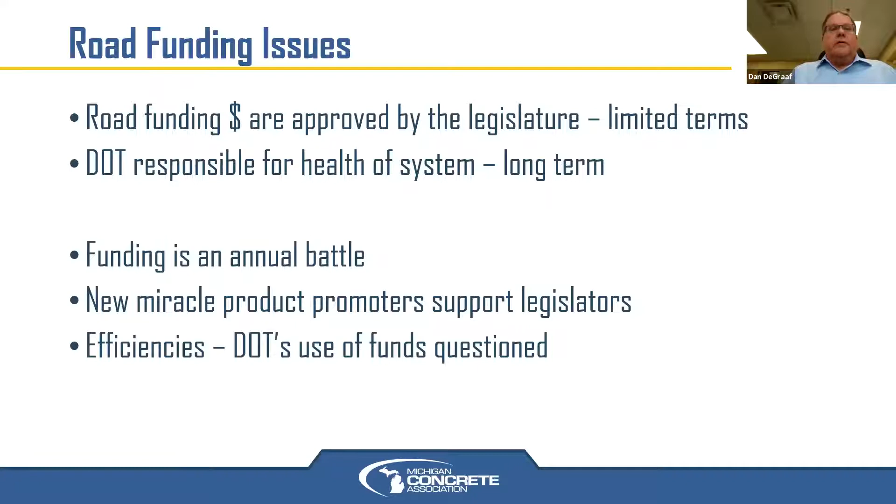So that's kind of the ground rules where this all started. Back in 2015, the legislature agreed to, over a 6-year period, increase the road funding in Michigan by about $1.2 billion.

But that came with a hook, and that was that the department was required to set up a road innovation task force. Their task was to evaluate materials and methods that could allow for roads to last for 50 or more years. They were willing to spend money up front as long as it produced life cycle cost savings over the long run. They wanted to focus on longer term fixes to maximize the value.

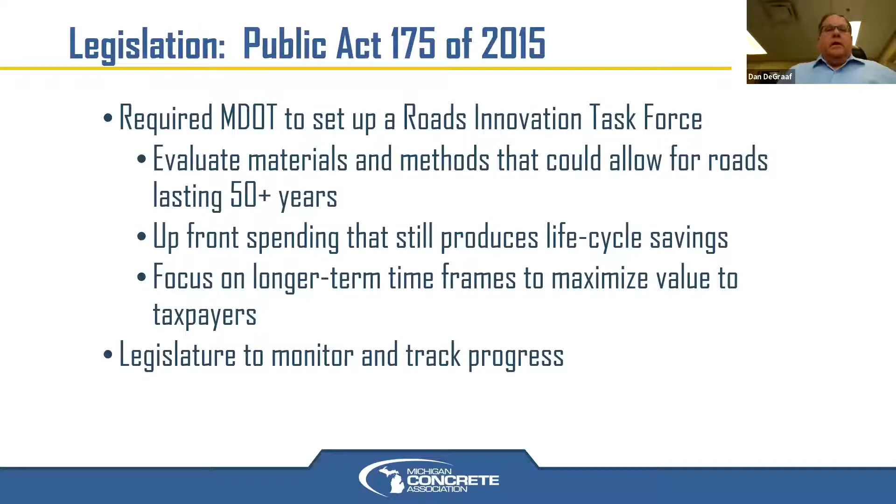They were going to monitor and track the progress. And they also had a caveat that a significant chunk, like $100 million of funding, was going to be tied up until this task force investigated, reported, and had a plan to proceed.

So what are we looking at? Currently, the department's standard design is based on a 20-year design using either AASHTO 93 or the ME pavement design. We look at 20 years of traffic, 20 years of performance. But they've historically found that with that 20-year design and maintenance, they can typically get a 35-year service life out of a pavement. So the proposal was to come up with a 50-year design, which would project maybe 75 years of service. And as a sideline to that, they said, well, let's try a 30-year as well.

So what was established back in 2016 is they elected to build 4 projects, 2 in asphalt and 2 in concrete. Each one was going to have a 30-year design and a 50-year design. I'm going to basically just talk about the concrete ones.

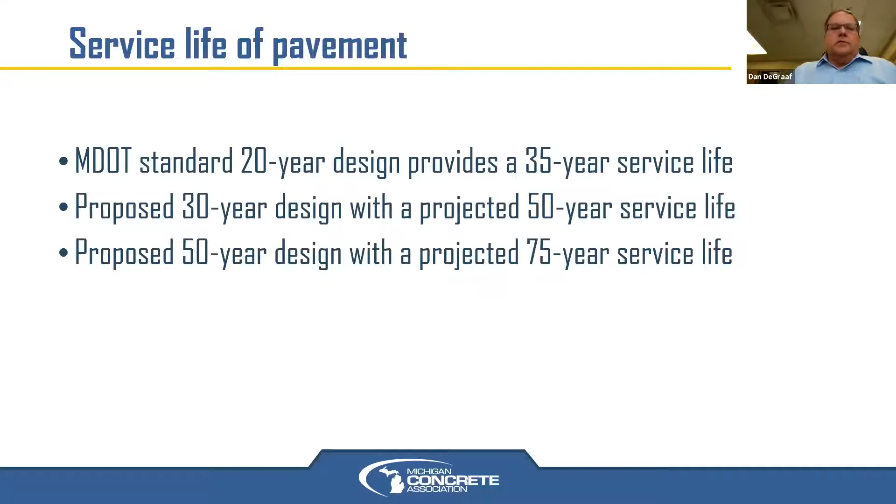When you look at cost, the standard design for this one section on our project in Grand Rapids, about $1.4 million per lane mile is what they were going to spend, with an equivalent uniform annual cost over a 35-year life of $55,000 a year per lane mile.

The 30-year design and the 50-year design: the 30-year design cost about 10% more, and the 50-year design cost about 15% more. But as you can see on the far right side, the equivalent uniform annual cost for the 50-year design was down at $37,000, which is a 50% reduction in the uniform annual cost.

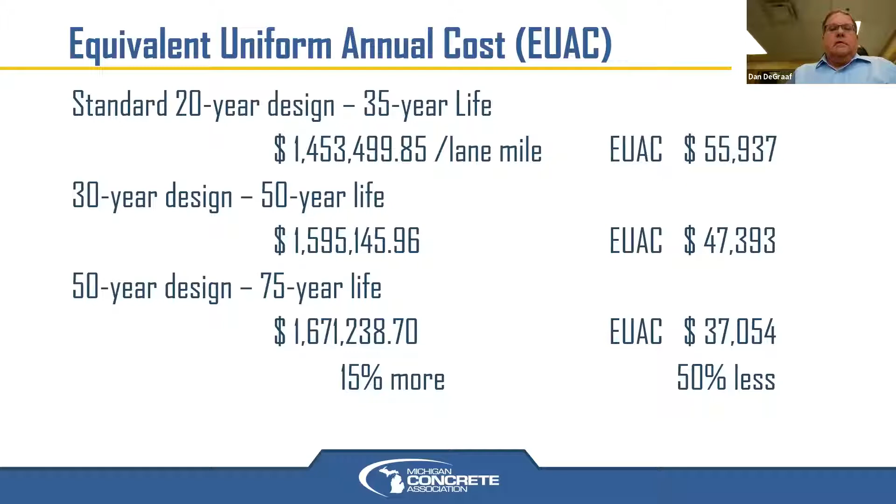So the concept is there. If we spend the money up front, we can get better bang for our buck long term. At least that's the theory that we've operated under. Obviously, it takes more money up front—initially we're going to have a bigger amount of funding that could taper off in future years.

But is 75 years really possible? We had a chance to go down to Bellefontaine a few years back. That was a piece of pavement built in 1893—it's 127 years old now. So it is possible to build long-term.

In Michigan, we have several great examples. One is between Holland and Grand Haven, a piece of pavement that I remember as a young kid—when we crossed the 4 lanes of concrete, we were almost to Grandma's cottage, and my trip was almost done. That project is now 66 years old, and it's still being used today as a concrete pavement with a concrete surface.

US 131, if you've been through Grand Rapids, that was built in 1958, and we're still driving on much of that as original surface. It has been repaired, CPR'd a few times, and diamond ground at least twice now, but it's still carrying on.

And then over in the Flint area, in an area that has more clay soils, we still have one that's now 53 years old that's going to be rebuilt next year. But we also have many, many miles of composite pavements all over the state where the base pavement is still carrying the load, even though it's been covered up with asphalt.

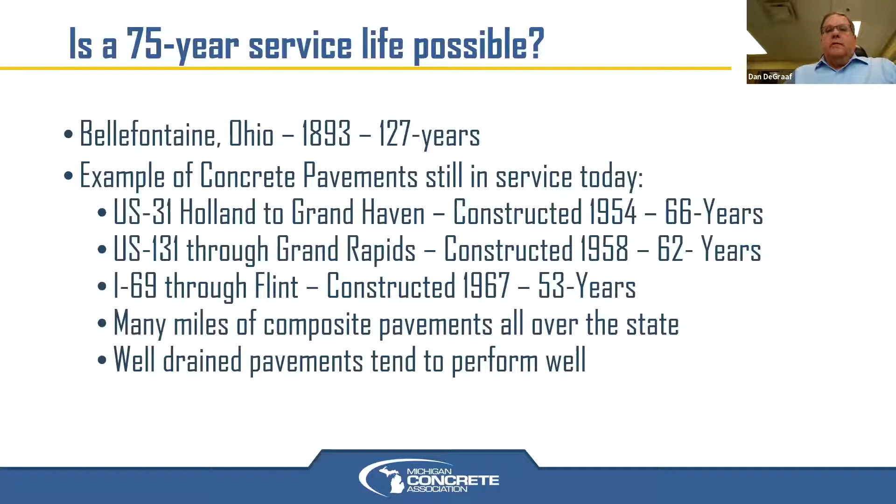What we did find is well-drained pavements tend to perform well. So as I drive and travel, I look at pavements—many of you are pavement engineers as well, and your wife always tells you, why are you looking down all the time? Well, we like to look at the road we're driving on. We like to see what's happening.

But as I look at progressions over 18 or 20 years, a lot of times projects are 10, 15, 20 years old, and you don't see much going on with them. They're just there. If we do have a problem with durability, that usually shows up in year 5 to 10. We'll talk about some things we've done that I think we've solved some of those problems.

But you're going to find that at some point you're going to start feeling a little bit of faulting, and it usually starts in the truck lane. So that right lane gets a little bit worse, but the passing lanes are always in pretty good shape. We see sealant breakdown, edge loading, cracks start to form. And then we see some of the panels start to move around a little bit—maybe you see some more spalling going on.

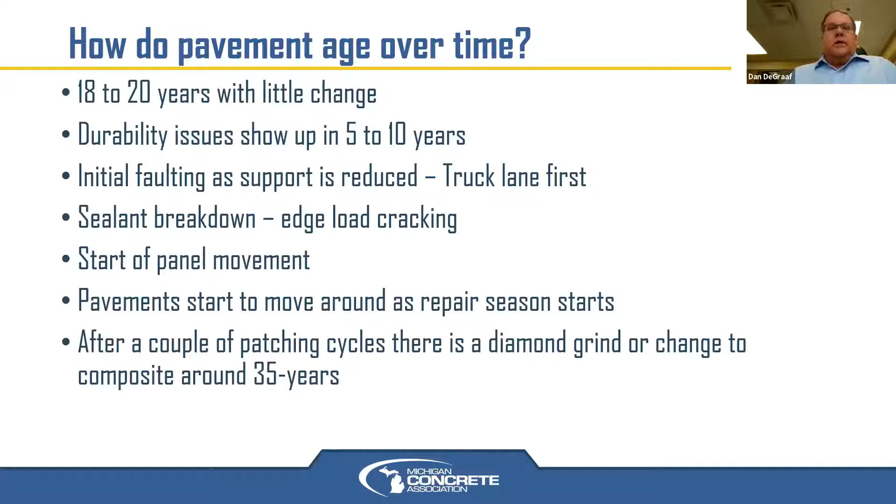But the pavement starts to move as the repair seasons start, and that's what I see for a couple of cycles of patching usually. Every 7 to 8 years, you'll go in and do some patching, diamond grinding. Then around year 35 is where on average we turn it into a composite or talk about reconstruction. But we have many examples of pavements that are still left in service long after that, because funding is always a problem. So what do we need?

I have seen very few pavements fail because they're not strong or thick enough. But they seem to reach a point where the base support starts to let the pavement surface down, and then we start seeing failures. At 40 to 50 years old, concrete starts degrading and crumbling. So it goes hand in hand, but water seems to be our common enemy. The subgrades are affected by water and moisture, as well as freeze-thaw affecting the durability of the concrete surface.

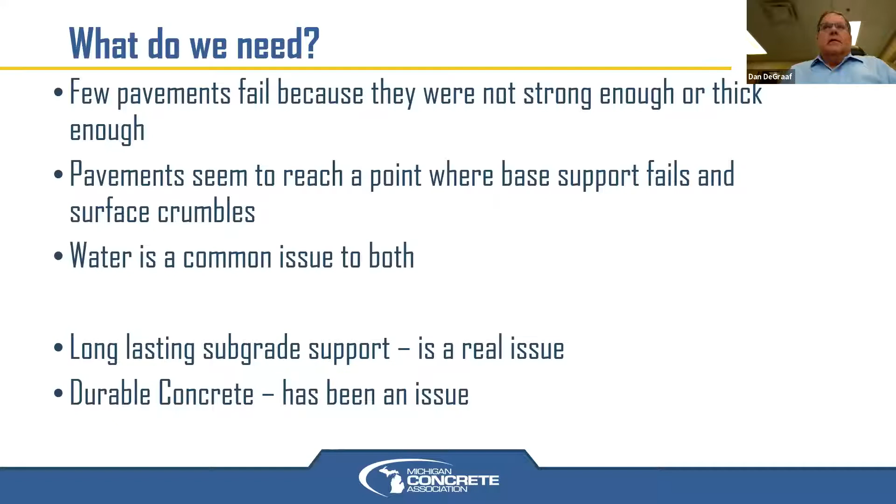So what do we need? We need a longer lasting subgrade support. This is our real issue that we've got to work on. And durable concrete has been an issue, but we are making really good progress on the durability of our concrete.

So the committee came back from their research. They were actually an internal task force of MDOT staff. They reached out to industry, to academia, and inquired from other DOTs around the country for input. But they were on a very short timeline and tried to pull some things together quickly.

The one thing they came back with is for better long-term support, maybe increase the granular thickness. In Michigan, we built almost all of our freeway sections with a 10 to 12 inch layer of sand underneath them, and I'll show you that in a few minutes.

We want to increase the drainage. And they decided that a 2 to 3 foot freeboard from the under drain to the ditch bottom was going to be something they'd require of this upgraded pavement.

They wanted to stabilize the aggregate base layer placed directly beneath the concrete layer. They really liked what they've done with some of these stabilized bases, so they added that to the system. The other thing we talked about—and Ohio, you've got a lot of experience here—was waterproofing the subgrade with a soil stabilization layer, to stabilize that top layer of the existing subgrade soils, keeping that grade in the same support condition for a longer period of time.

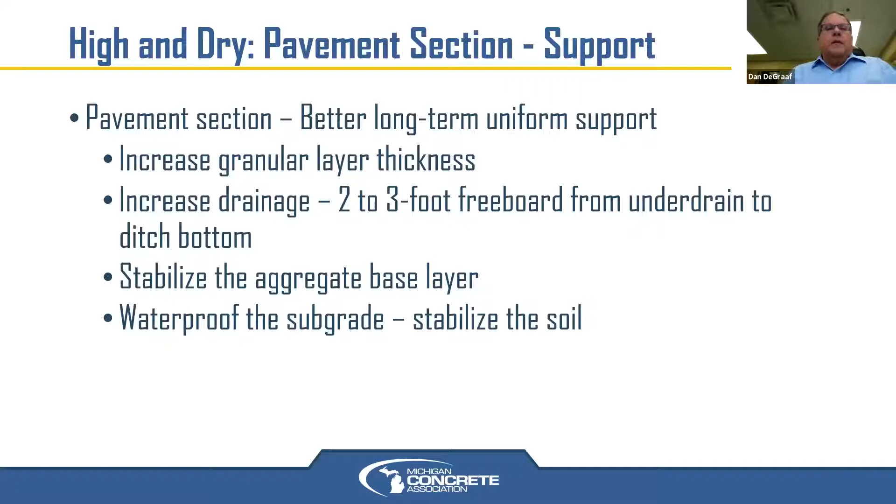What I'm showing you here is our 50-year sections. We actually built two 50-year sections. The far left is our standard 20-year design. We have existing grade, and in this case we've reused it, with 10.5 inches of sand subbase—that's a class 2 type material.

We now throw a geotextile separator layer over the top of that, usually a woven geotextile. Then we place 6 inches of open graded aggregate on top. Over the years I've asked, what does 6 inches of open graded really mean? In Indiana, we built with 4 inches of open graded material, basically concrete aggregate with no sand—very marbly, you could hardly walk on it.

The open graded layer we use here in Michigan, the 6-inch layer, is built with a well graded, larger size, 3/4 inch down material, but we limit the minus 200s. So it's a material you can drive a pickup or a truck on. You don't want to use it for a haul road, but you can back a truck up to a paver and dump concrete on this surface. It holds that load, but allows water to pass through, while having enough stability that you can walk around and work on it.

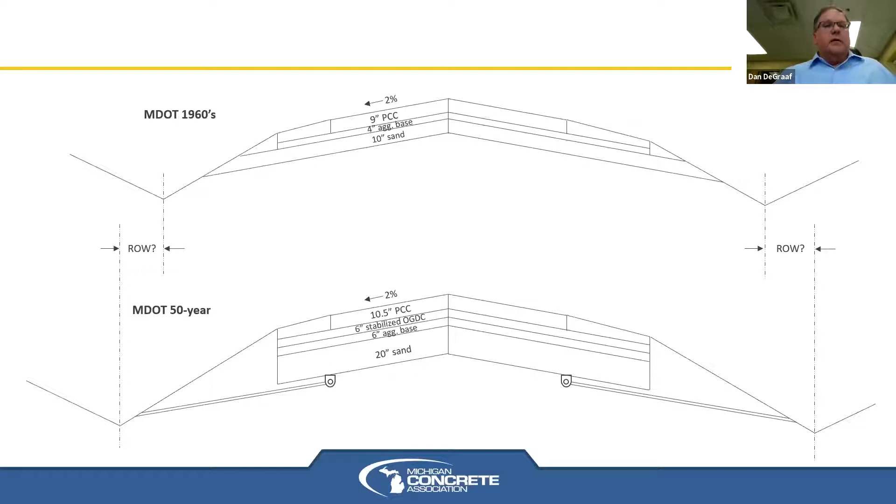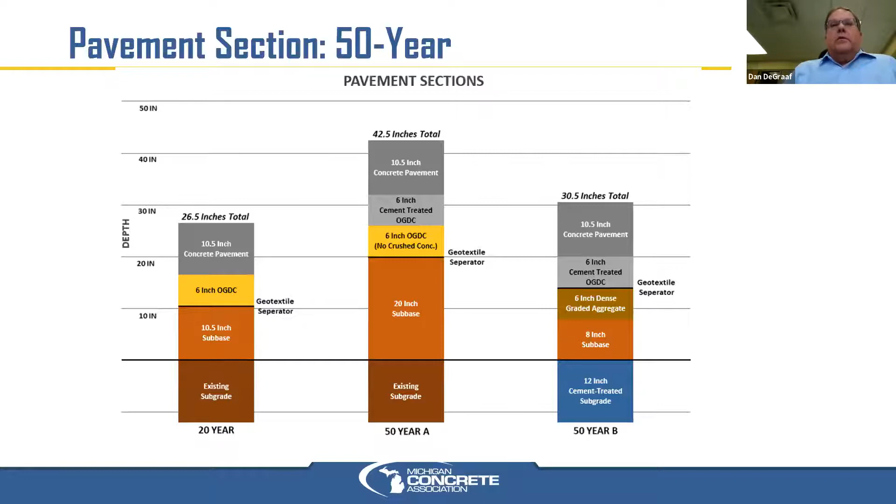That's a pretty substantial change, and that requires significantly more right-of-way, which is almost a deal breaker. That's why we came back with this section - the 10.5-inch concrete section that only had 30.5 inches of material using that stabilization. That really helped us reduce that section, and I think it will really help us reduce our costs long term.

On the 30-year design, this was built over in Flint, off of 75 and I-69 on the NAFTA route. The standard section was our 10 inches of base on top of the clay grade, 6 inches of these open graded aggregate, and 9.5 inches of concrete pavement.

Our 30-year design was that we treated the soil with it, and in fact it was a cement stabilization. The materials - you know, to stabilize, you can use lime, you can use fly ash, you can use cement. But the soil itself is really what should dictate which material you should use. With certain more granular materials, lime becomes less effective. The heavy fatty clays, lime is pretty effective. But those are the kind of decisions that your soil engineer can make.

We had 8 inches of the sand base on top of that. We added a dense graded layer, and this really became our working platform. But again, we limited the -200 a little bit, so water could pass through this material. Then 6 inches of cement treated, open graded base, and 10.5 inches of concrete pavement over the top. Our sections had about a 5-inch difference, but it was pretty reasonable.

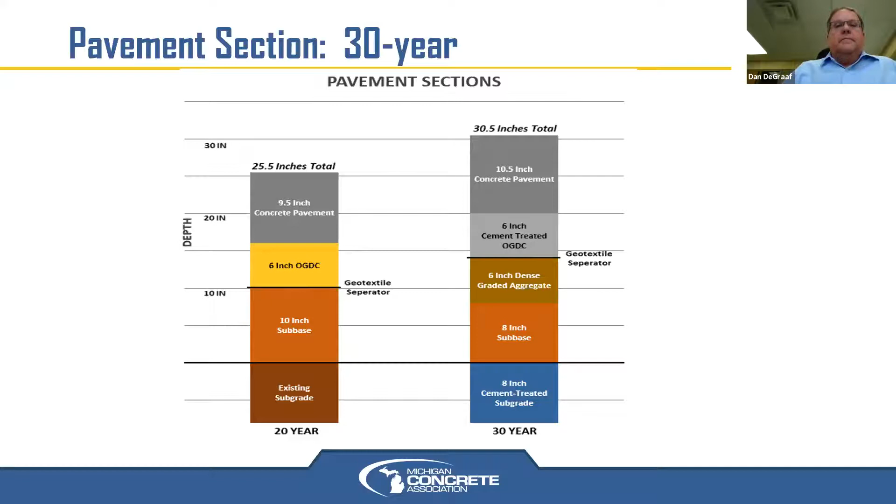Typically in the past, our sections were that if we found some unsuitable material, it could be some bad material, but most times it's material that has too much water in it. Its water has been drawn up to it. You run heavy equipment in a field back and forth over the same spot, and you can bring water up pretty easily. So what they've done in the past is a lot of undercut and backfill.

Now what we're doing is, when we undercut and backfill, it's important that we add some drainage piping to pick that water up. If we don't put drains in and we put some kind of granular material back in, we are creating a hugely non-uniform support system for our pavements. And we wonder why after 20 years we start having pavement failures when we've artificially created a non-uniform material that we build our pavements on.

The drainage is critical. I know in Ohio and here in Michigan, we do get our share of rain. We're not out west where we have no humidity and no rain. We have lots of rain in our state.

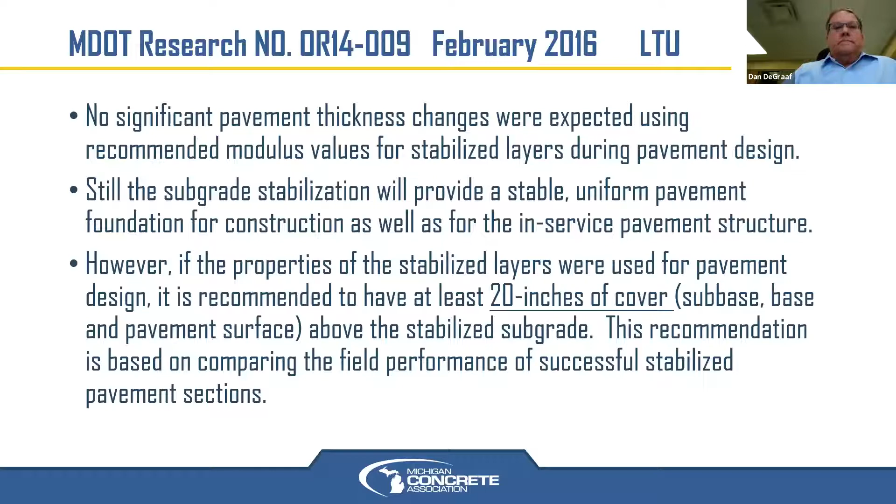The other part of the equation for building a long-term pavement is the concrete layer itself, and that's where durability comes in. In Michigan, we've been working for about 15 years now with well-graded aggregates and reduced cement content. Our standard paving mix now, the pavers are usually running with about 500 total pounds of cementitious material, and we're replacing 35% of that cement typically with a supplemental cement. So we are using much less cement, and we're using well-graded materials, putting in smaller aggregates, replacing some of that cement paste.

The cement paste is the weakest part of the concrete, so we are reducing the weak stuff and adding in more aggregate, which is the better quality. We're using supplemental cements year-round, because in 25 years, that concrete doesn't know whether it was built in July or November.

We're looking at our air systems. We had to build some better air systems than what we were building in the 90s. We're also changing some of the testing that we're doing on the air systems, looking at permeability testing. If we can make our concretes dense so water can't get in, all of the other bad things can't get in, we can make our concrete somewhat waterproof.

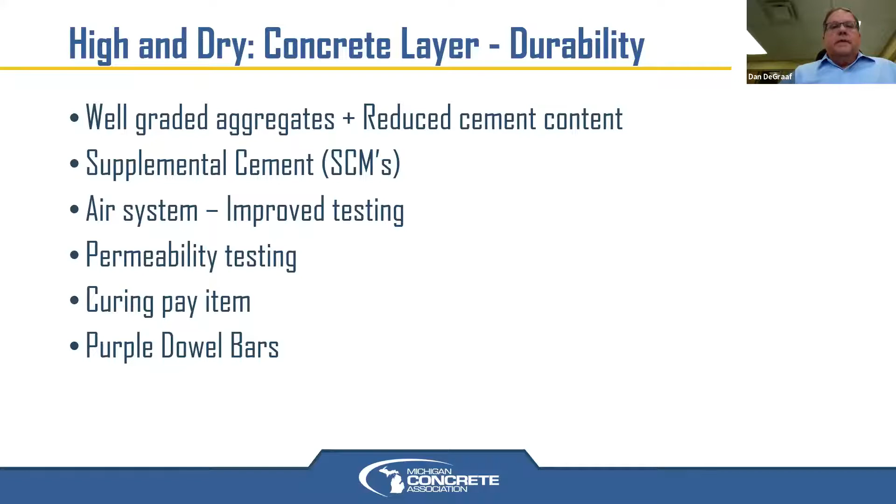I took this picture off of another college campus nearby my office here in Lansing. And the caption I put on this thing, snow is coming sometime. And you can see this path, they were spraying a salt brine on the pathways around campus because they knew it was going to snow in the next couple of days. And you can see how a chloride-based salt brine brings in water from quite a ways away. And it seems like it's always wet.

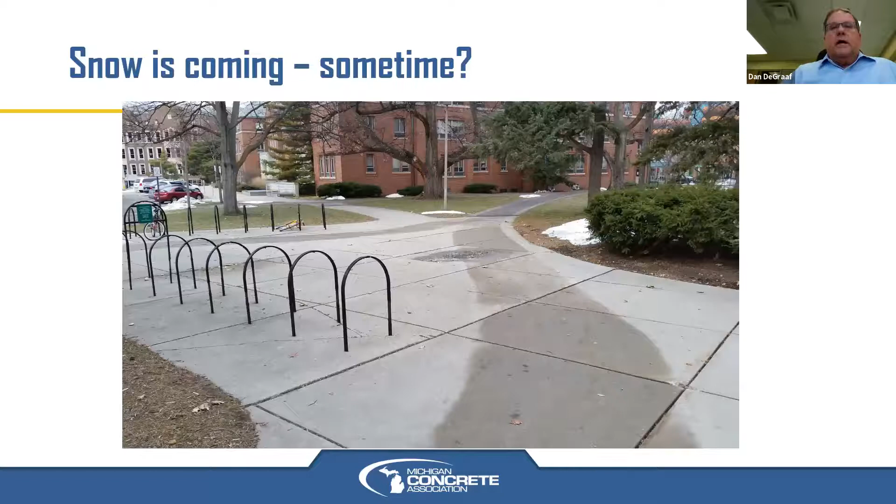On a sunny day, here's a sidewalk near my office. Look at all the water surrounding the calcium chloride salt pellets. Calcium chloride attracts water. It stays wet. It's great for dust control. That's what you put on your gravel roads, right? Whereas sodium chloride, or rock salt, safe salt, it does not attract water. It kind of turns to dust on you once the snow and the moisture leaves.

This is the stuff we should be putting on our roads, like the old rock salt. But these new calcium chlorides were some pretty bad actors that we've had to deal with.

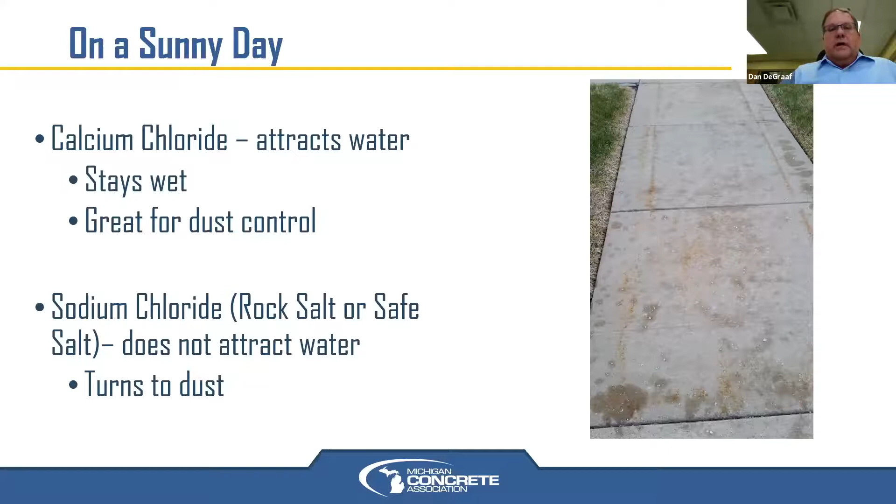Jason Weiss, formerly out of Purdue and now out of Oregon State, has done some really good research. And these salt brines are getting into our concretes, and they're reacting with the calcium hydroxide in our concretes. And they're producing a new material called oxychloride material. We put air entrainment in the concrete to protect it from water expansion during its phase change from a liquid to a solid. It can expand about 9 times. Oxychloride expansion potential is 30 times. And then the temperature required for this reaction can be well above 32 degrees. So you don't have to get to 32.

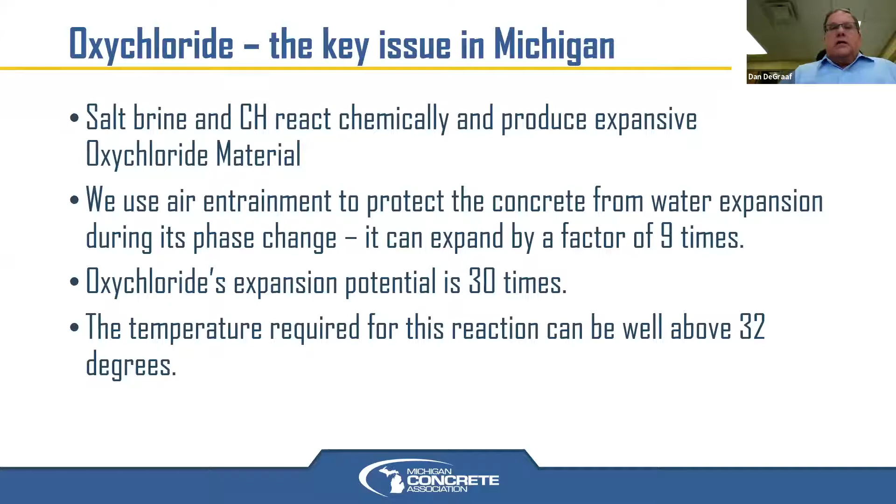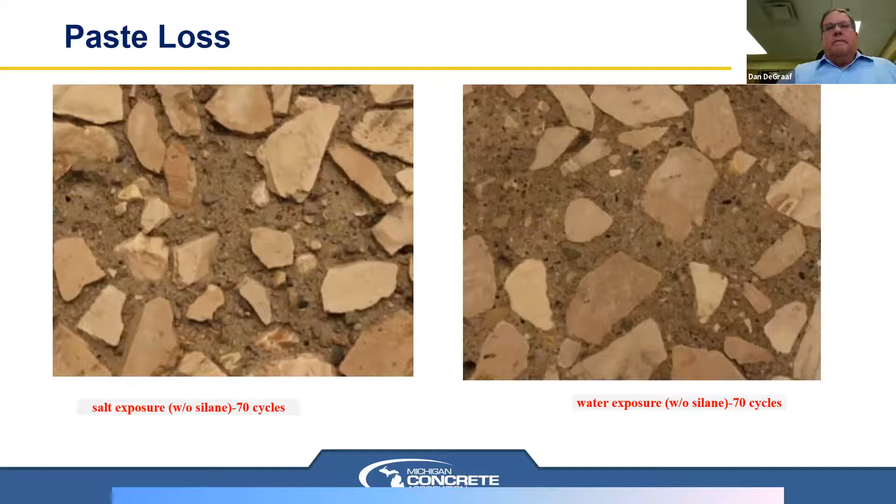It can go through a phase change in the upper 30s. So how many more cycles can we go through in a winter where it doesn't quite get to 32, but we still made a phase change that created a negative reaction? Will Hansen out of the University of Michigan has done some really good research, along with people up in Michigan Tech, Larry Sutter. This picture on the left is a sample that was run through 70 cycles of salt exposure. And these rocks weren't just placed there, they were placed just like they were on this right side. This is a cut sample, but the paste has just been eaten away with 70 cycles. With just distilled water, where we have a decent air system, we got no erosion. But this salt has really been problematic, and that is something that we've had to learn to deal with here.

So the hydration reaction, this is just a little quick chemistry, but you put cement plus water, you get CSH, calcium silicate hydrates, and you get CH, calcium hydroxide. These are glue, like stalactites and stalagmites in a cave. Calcium hydroxide is chalk. So we get some really good stuff and we get chalk.

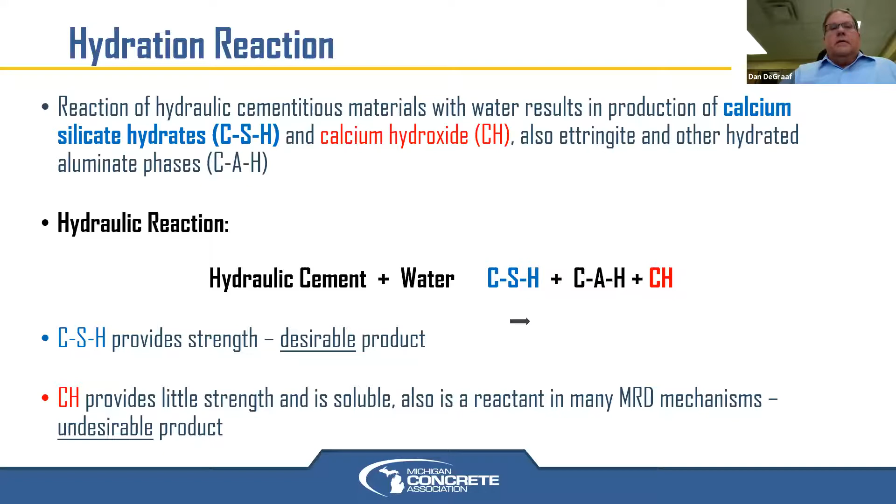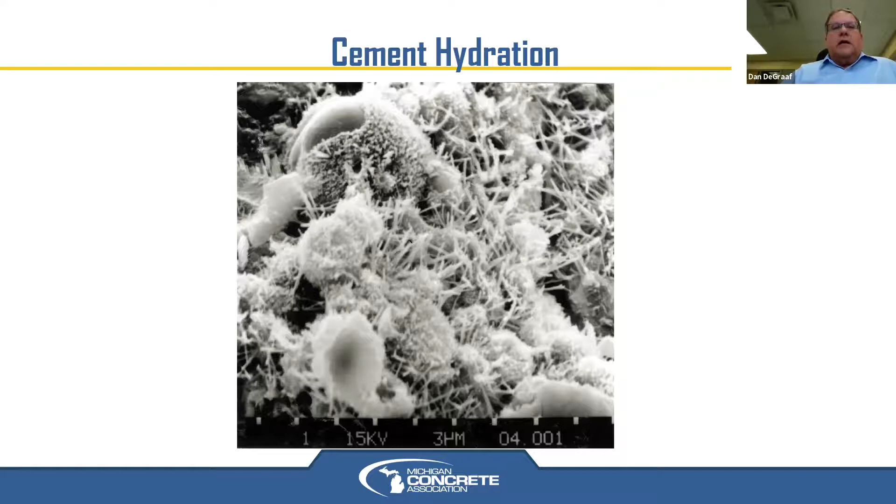During the cement hydration process, you see how these tentacles of calcium silicate hydrate grow on top of cement particles or aggregate particles. That's what connects everything together. But between all these little particles, that's where the calcium hydroxide settles in and sets up. Calcium hydroxide is leachable. Water can get in and take its calcium hydroxide out, and now we have voids.

So the solution is we use the supplemental cements. It could be a fly ash or it could be a slag cement. Cement and water react, like I said before, to get calcium silicate hydrate and calcium hydroxide. But you add the SCM to it, and it reacts with the calcium hydroxide. It's a secondary reaction, mind you, and you get more of the good stuff. So day 1, you have this reaction. Day 2, you start getting more of the good glue put together. The supplemental cements make more calcium silicate hydrate, but it consumes the calcium hydroxide, the stuff that is of no value in the mix.

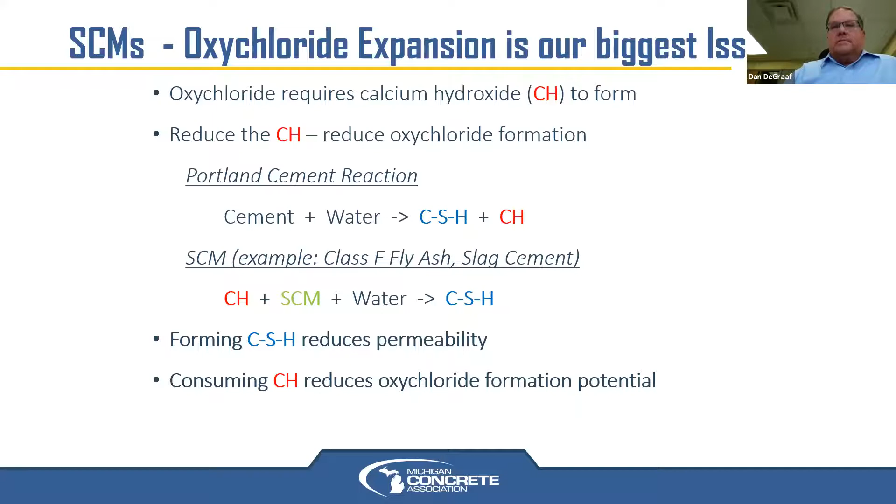The other thing we got to watch - my 25 years of paving concrete taught me this - is how we place our materials. The well-graded mixes with SCMs do not need extra water. The first thing I see crews do when they get a load of concrete is add 10 gallons of water, many times without even looking at the stuff first. But with supplemental cements and well-graded materials, we don't need the extra water. They do need to be vibrated though.

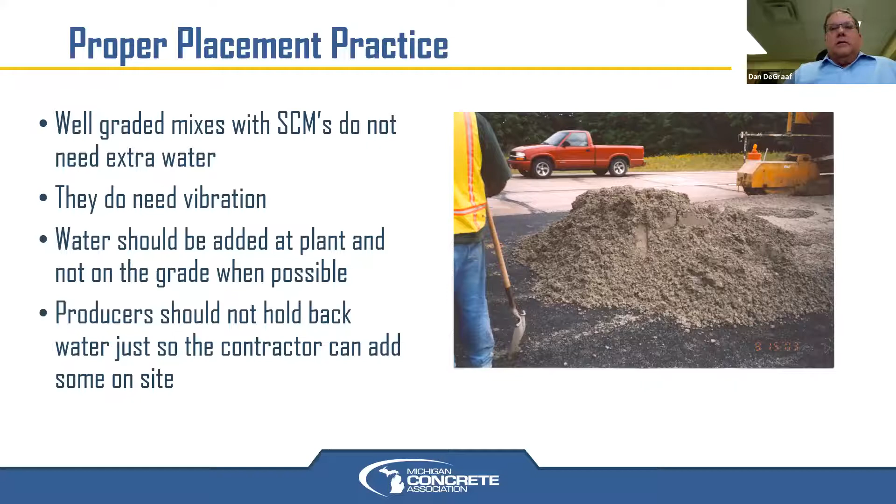Water should be added at the plant and not on grade whenever possible. It's okay maybe to adjust the first truck out of a pour, but by the time the first round goes through, they ought to be making all the adjustments at the plant. Producers should not hold back water just because the contractor wants to add some on site. We need to get control of that.

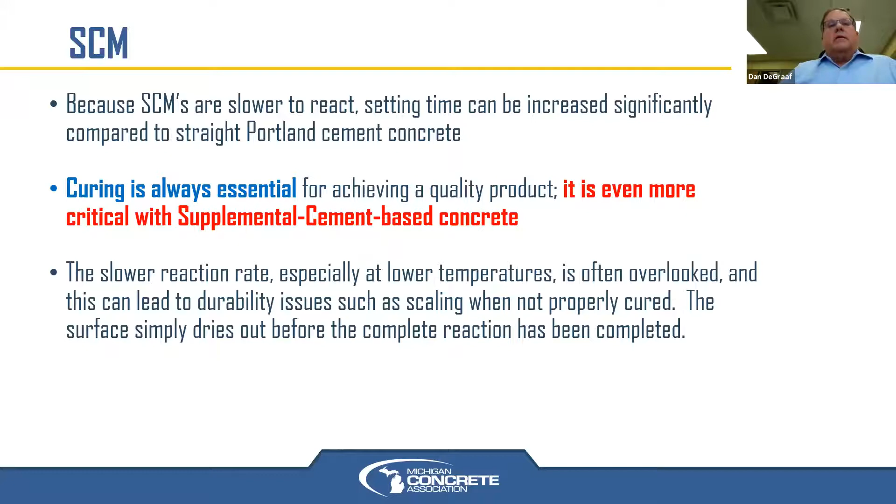Because we're using supplemental cements year round, many of our pavers now in the winter, fall, or early spring will bring boilers in and hook them up to their central mix plants to get the mix temperature up so we can have reasonable saw times. But curing is always essential, and it's even more critical with supplemental cement concrete. That surface needs water to hydrate to make it durable, and we do that by curing - we keep the water in through the curing process.

The other thing we want to look at is the air system. We've always measured air content and strength, but air content only tells us half the story. The air stability relates to spacing factors, so we need to know the stability or the quality of what kind of air we have in our concrete.

What we've been doing in Michigan for the last probably 15 years is measuring the air content of the concrete before the paver for acceptance, but we also take a check on an occasional basis behind the paver, and we look at that delta - how much air loss are we getting going through the paver. If we get more than 1.5% loss through the paver right now in Michigan, we have to stop and figure out what's going on. Most of the pavers are losing about 0.5% to maybe 6/10 behind the paver, but we know with that level of loss, we're getting really good, durable concrete out of it.

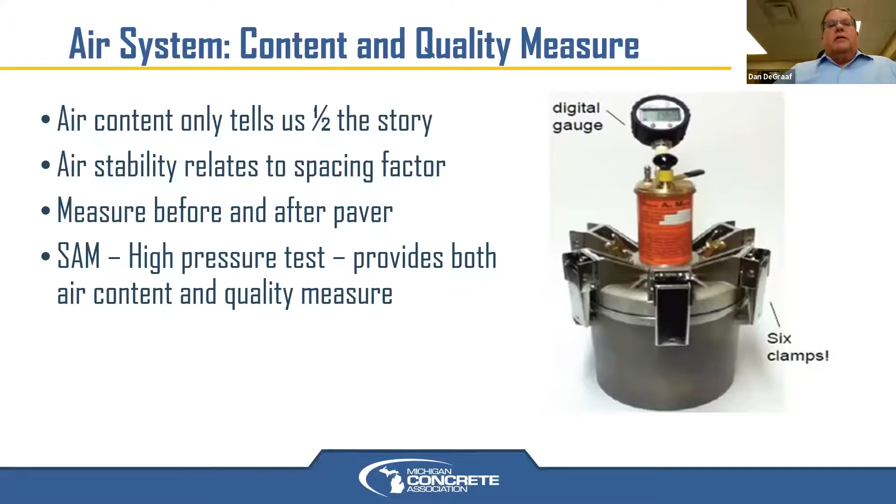So we're measuring both the total air content and the stability. A new tool we're using, and I think you guys are probably doing a little bit of this in Ohio too, is the super air meter. With one test, it tests both the air content and the air quality, using much higher pressures than a standard air meter, so it's got extra clamps. We're finding it's very operator intensive, but its ability to predict is pretty good - we just got to figure out how to record and classify and make sure the test was actually good.

We also are looking at permeability, and the test we're using now is resistivity. You've heard of the chloride ion permeability test with coulombs - you get down below 1,000 coulombs, very low permeability, very hard for water to get in, very hard for all the salts to do damage. We want low permeable concrete. Our standard 6-bag mixes were probably in the range of 4,000 coulombs. The stuff we're making today in Michigan is probably around 1,000 coulombs on our standard paving projects.

And by the way, with the reduced cement, our average strength went up 1,000 PSI. So the pavers are averaging about 5,500 PSI with their standard paving mixes at 28 days. Impressive.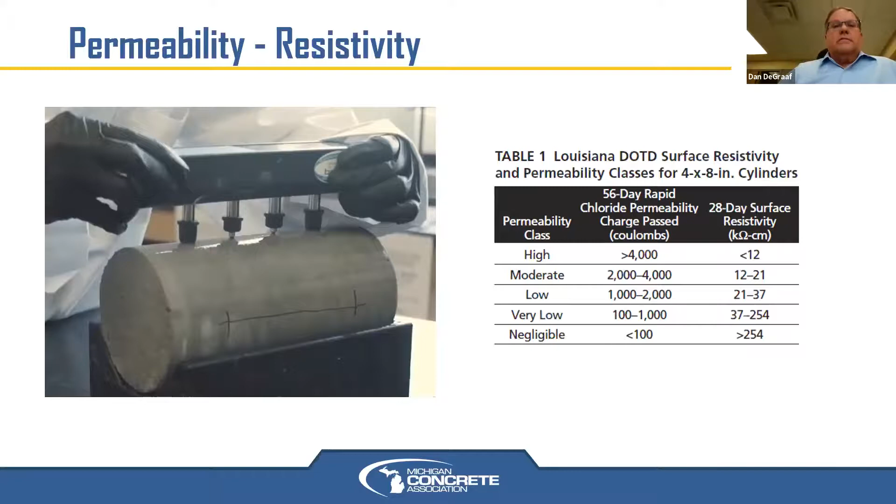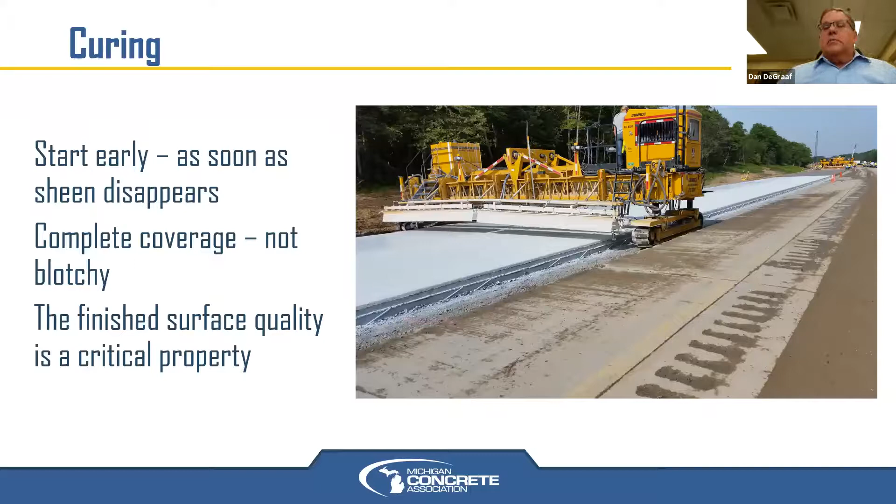Curing - you want to start it as soon as the sheen disappears. Complete coverage, but not blotchy. The finished surface quality is really the critical property we're trying to get at here to make our surfaces durable. One of the things we did with these new projects - the 70-year, 50-year, and 30-year projects - is we had a new cure spec where we are measuring for acceptance the cure application.

We're looking at the time of application - 30 minutes or 15 minutes after the sheen dissipates. Rate of application: in Michigan, it's 2 coats at 1 gallon per 25 square yards each coat, or 225 square feet per gallon per coat. And we're also looking at the uniformity of application.

Admittedly, the uniformity of application is more in the eye of the beholder. You have to go out there and look at it. Does it look blotchy or does it look pretty uniform? But all three of these are now used. If you're non-compliant, more than 30 minutes behind, it's an automatic suspension of operations until you get back under control. The engineer can administer a $1 per square yard price adjustment to the contractor if they're that far behind. So by measuring it, we're getting a lot more attention paid to it.

In my years as a paving superintendent, I would always go back to see how the cure machine was doing, because everybody was concentrating on dumping the trucks in front of the paver and moving the paver down the road. It seemed like the poor person on the cure machine was like the Maytag repairman, kind of off by themselves. But by doing this, we've really brought attention to it, and it really has helped us get that cure on quickly.

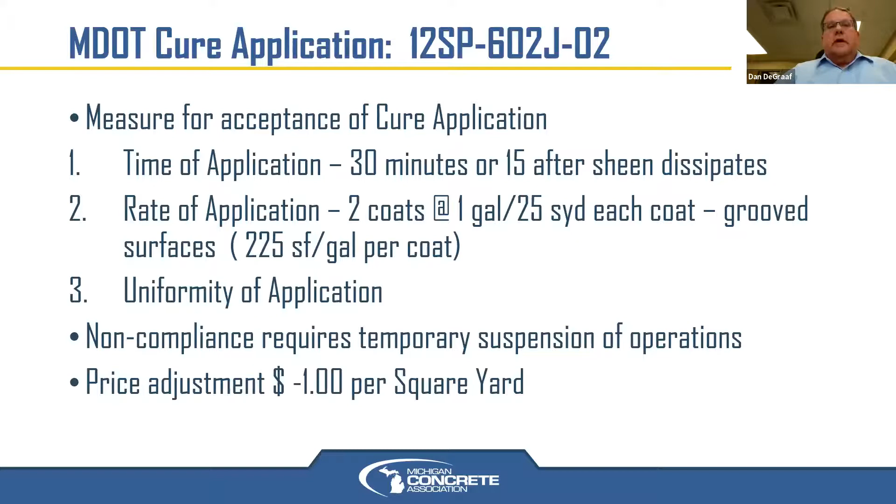Dowel bars. I think you've probably got some of the purple dowel bars in Ohio, but typically in the past everybody used a green epoxy. What we discovered as we looked into this was that the green epoxy was basically developed for rebar when you had to bend it. So it's a more flexible material, but it doesn't do well for scratching. It's fine for flexing, but when you're dragging something, it's not the best epoxy. The purple epoxy is an epoxy that was designed to wrap pipes as they dragged them through installation and seabed floors. It's a much more friction resistant, scratch resistant epoxy.

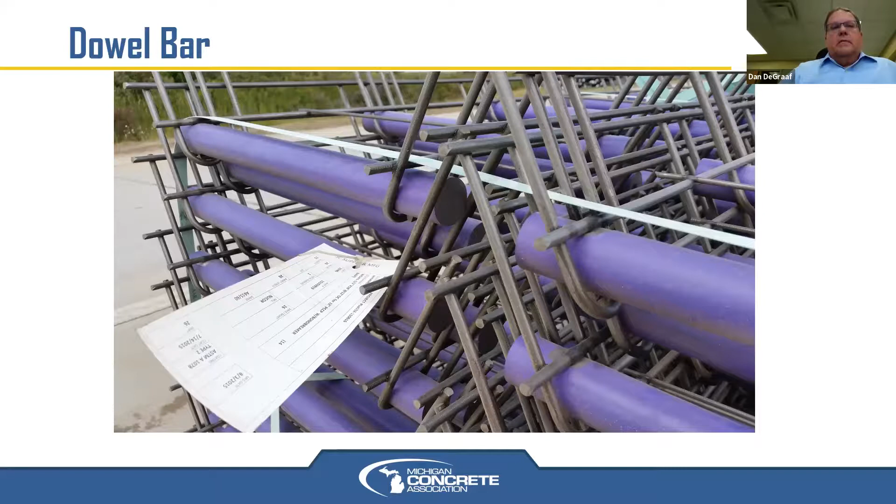So we made the move to use these purple bars for that. In addition, we do not coat the ends right now, because we're really worried about this 5 or 6 inch range in the middle of the bar. But if we wanted to upgrade this and coat the ends, it appears this material will pass many of the same specs required for stainless steel bars as far as long-term performance. So we're looking forward to see how these work. It was a minor incremental change in price, but it was something we agreed to work on with the department.

Future - what are some of the thoughts we had going on some future projects? As I said earlier, the left lane of these freeways doesn't seem to be the problem, it's always the truck lane, the right lane. We do think a lot of it is base issues. So one of the ideas was, let's trim the subgrade in at least the truck lane at a 3% cross slope. That will assist in getting any water that comes through to exit the system. 3% will drain better than a 2%.

Then keep the base the same, but let the concrete pavement get a little thicker on the edge. This is where the high stress points are with the trucks and everything else. Let's go ahead and let that outside edge be a little thicker, maybe make this the standard thickness and build in a little bit of comfort here. Maybe we've always built these freeways the same all the way across, but maybe we could start with a thinner left lane and a thicker right lane. Ways that we can move things forward. With the new grading we do with total stations, stringless grade control, this is a very simple thing to do in the field - something we'll be doing on some future work.

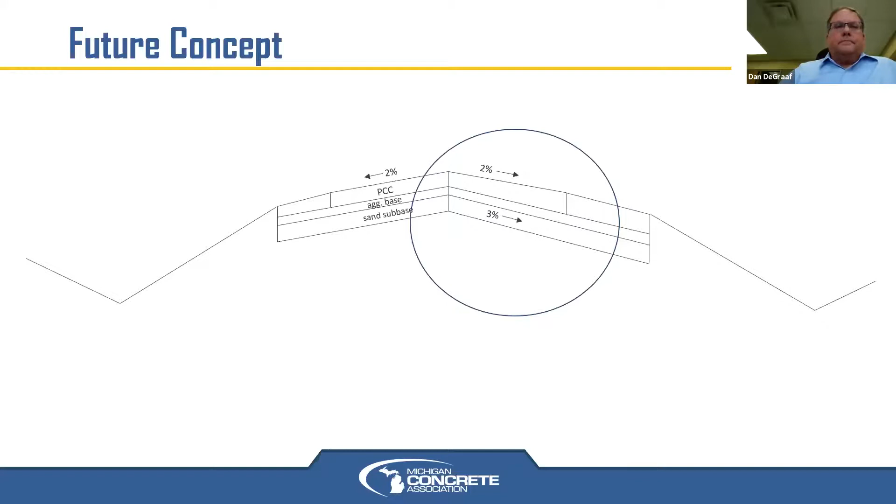Summing it up a little bit, I'll tell you the contractors' crews noticed a huge difference between the sections. We now believe, from the evidence we've seen, that our well-graded SCM mixes are making much more durable concrete, and the crews are at least feeling that we're building it on a better foundation. We think we have a system here that's going to perform like we anticipate. For a 15% upfront cost, we expect to see a 50% reduction in future annual cost - that can be a very good thing. The other thing is, the answer almost always involves more than just one thing. We have a tendency to solve one problem and move on, when really we have to look at the whole picture anytime we do something new or different.

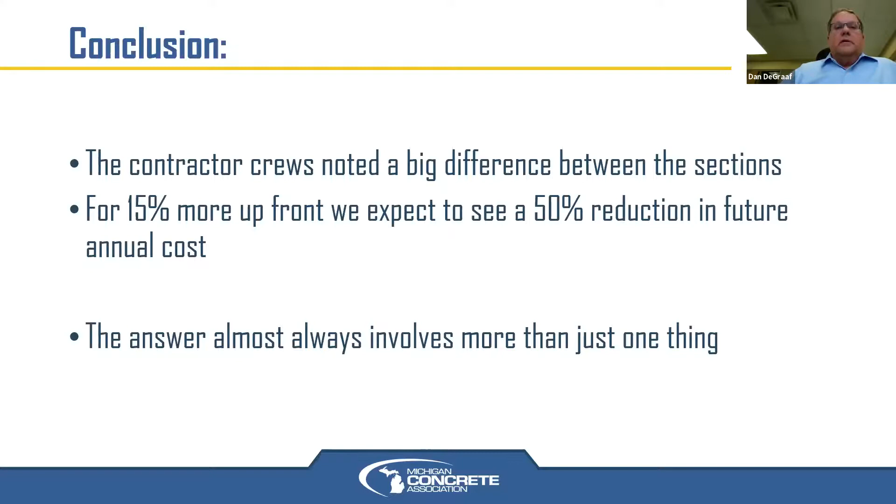I've got to commend the task force group that MDOT put together, and the projects we picked. We did look holistically at these, and we're looking forward to some nice long-term performance out of these projects.

With that, I guess I'll turn it back over to Wayne and see if we have any other questions. Dan, great job, appreciate it. We do have some questions, as a matter of fact - some relate back more toward the beginning of your presentation, but we'll go through them here. Is the concrete pavement competitive with the stabilized soil and thicker bases?

It all depends. I guess I would say in the heavy traffic part of Michigan, we are extremely competitive. In the northern part of the state, we're probably less competitive, and a lot of that is the designs. But every project we build in Michigan right now goes through the life cycle.

But yes, if we start stabilizing, we need to really look at how to equalize that 15% extra cost. That will be part of our discussions with the department going forward.

So kind of a follow-up to that then, Dan, is that 15%, is that what you're saying is competitive, if you can be within about 15%? Well, you look at bidding numbers and markets, and there are so many things that go into it that it's hard to make a general assumption.